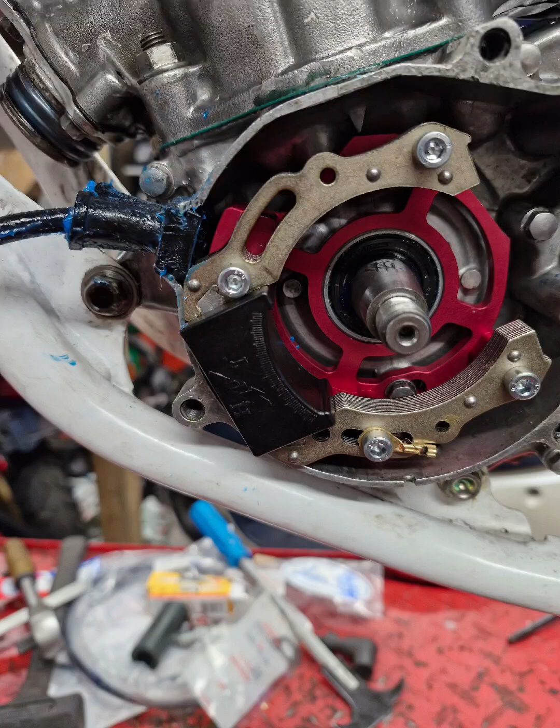So here we go. So she's all built up. 1997 CR80, and supposed to be a running bike when I bought it. Obviously didn't get him to fire it up, which is my own silly fault. I knew there was a problem with the gearbox, which is what I've sorted. And then she doesn't spark, and it looks as though the culprit is the stator.

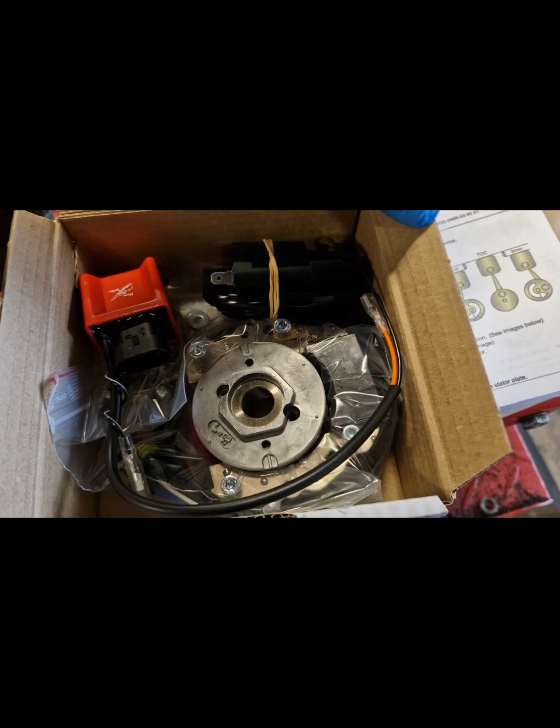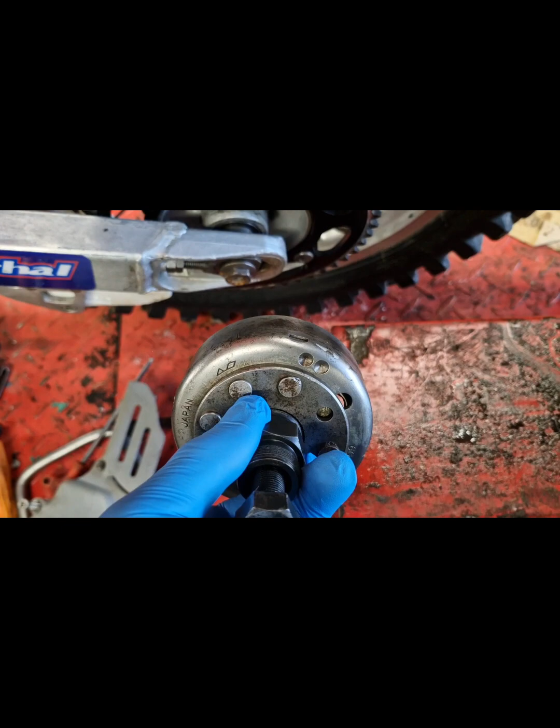So anyway, rather than messing about, I've just gone and bought one of my trusty HPI ignitions. So these ignitions come with everything, an internal flywheel rather than an external. So the external that would have been on it was this one. So internal rather than external. I do think that these do rev slightly freer than your stock ones.

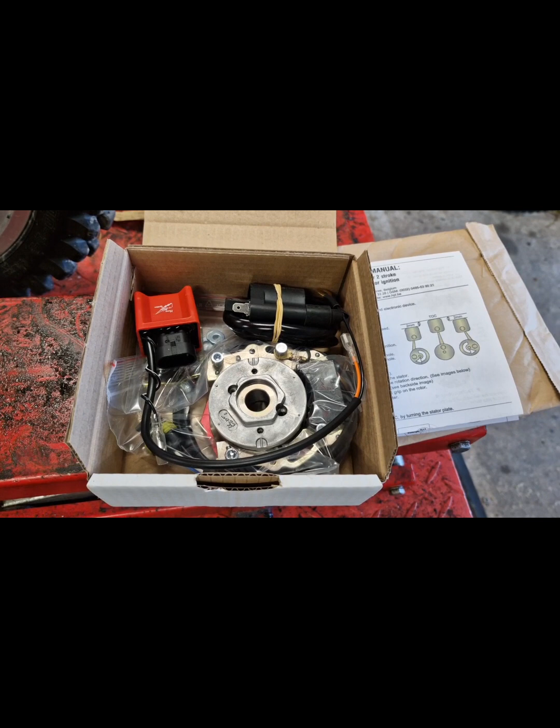So I've done quite a few HPI installation videos. They're pretty much all the same, but I'm going to do one for the CR80 anyway, just because that's what people kind of search for. So we'll try and be as detailed as possible, because in one of my previous ones someone said that the critical step that they were looking for they couldn't find, which I thought was there, but there you go. That's what we'll do. So the first job is, I've already taken the flywheel off.

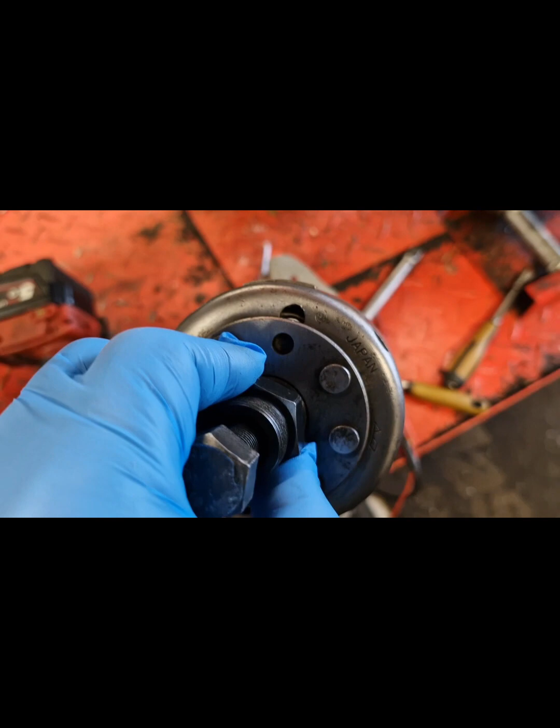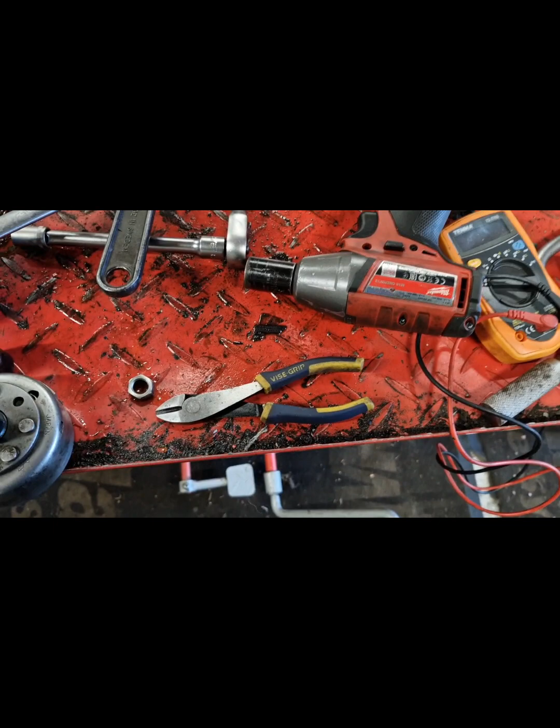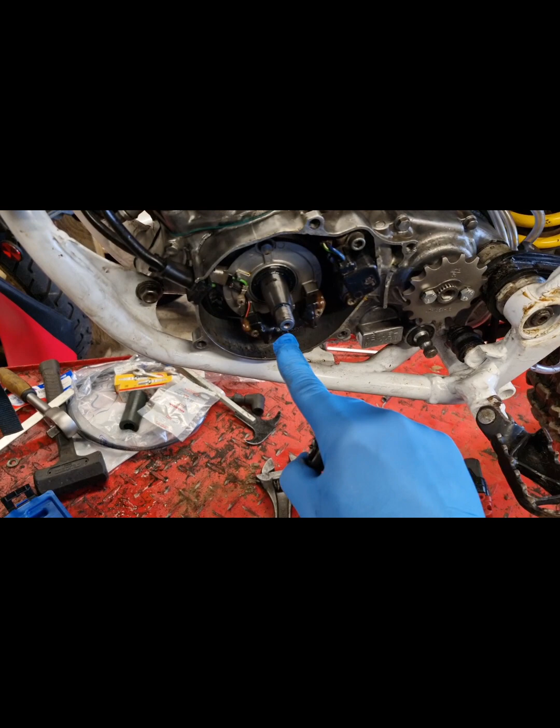You use a flywheel puller similar to this one. Basically you take the nut off. You need an impact driver gun to do that, otherwise you just won't be able to undo it. And then you use a flywheel puller. Basically the fat bit of the puller screws into the outer of the flywheel, so here, and then you use this bolt to tighten down, and that presses on the end of the crank here, and then it forces the flywheel off. Sometimes they can be really tight.

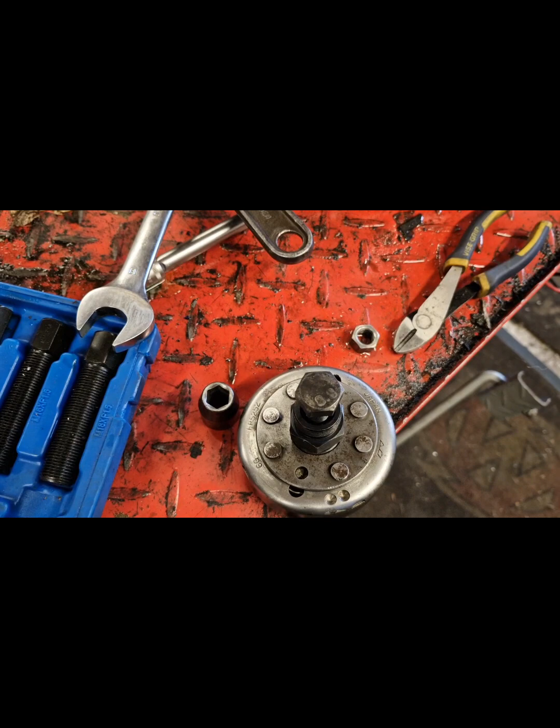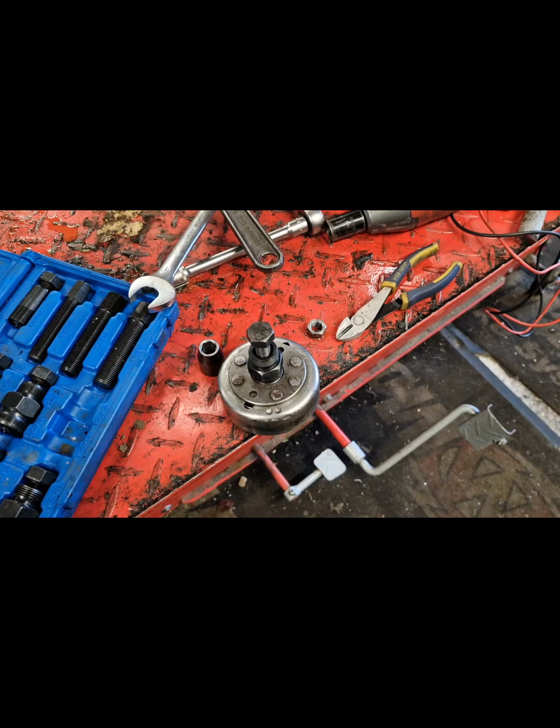I try not to use any heat, but what I do if they're really tight is I'll give the bolt on the end here a whack with a hammer, and then it's just a case of, you know, just keep on slowly. Do not try and over force it, which can be difficult and sounds a bit counterintuitive, but it's just the way that you kind of need to go with these things. So slowly, bit of a whack with a nice metal steel hammer, and then they do end up popping off.

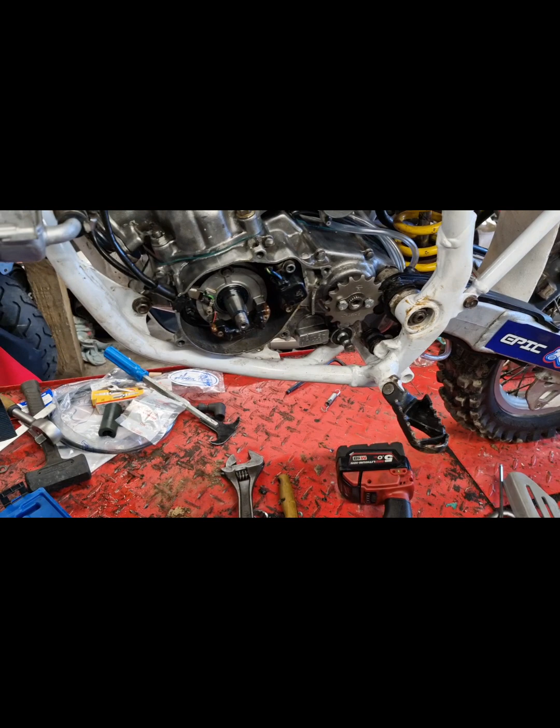And then once they're off, I'm going to take the stator off. This one's got a separate kind of timing sensor which tells it when to spark. Whip the coil off and everything, CDI off, and then I'll mount. In fact, so next video is I'll show you the new stator plate going on, and why I mount that in a certain orientation, and then we'll put the flywheel on, and it's those two bits that are going to do the timing for you. So that's going to decide when it sparks, and then after that it's just kind of mounting the various bits, the coil, the new CDI, and then wiring it up.

Okay, so I haven't mounted this yet, but I wanted to show. So basically, the big thing to get is there are mounting holes which the original stator plate bolted to. And so the key thing is to make sure that the new stator plate, which is the red thing in the back, and that's what's different to a lot of these HPI kits. So generally the actual stator itself is the same. It's all the mounting hardware that is different. So it's quite a complex piece of mounting hardware that's on this.

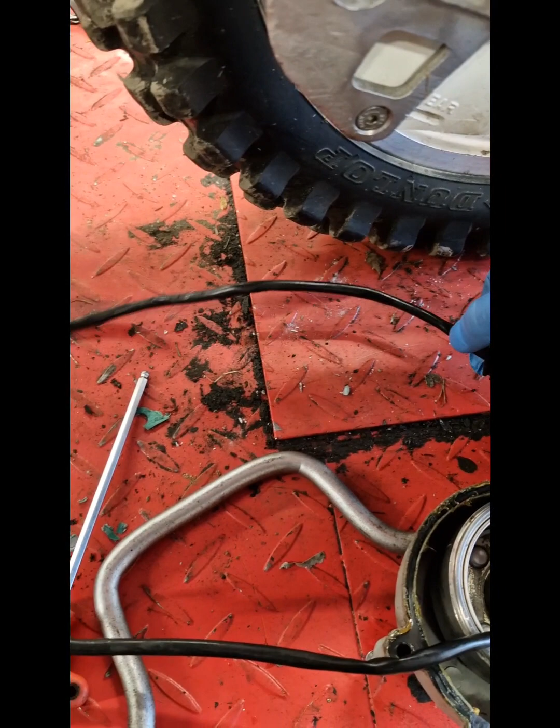And then the bit which I always find a bit of a flipping pain, and it does my head in, is this here. So this is where we want a nice seal from the elements, so from water mainly, and these kits don't come with that, which is a bit of a pain if I'm being honest. So what I generally do is I carefully cut the originals, so I can remove the wiring from the originals, and then I make a bigger hole in, so there's normally only one, there is two with this particular example.

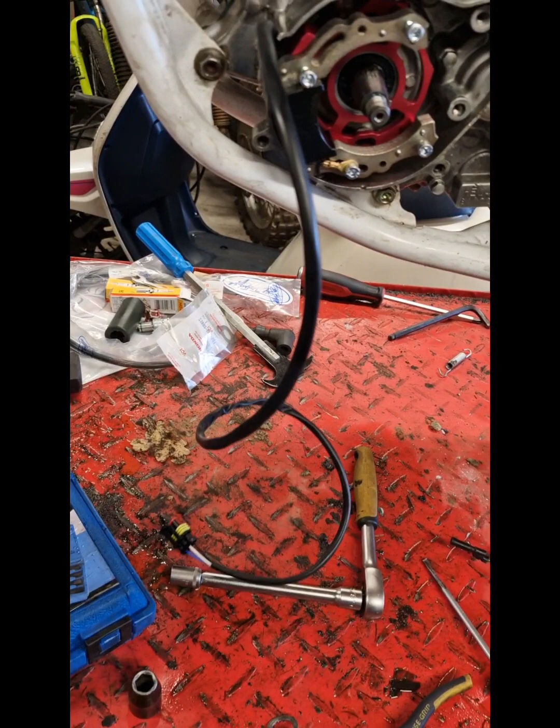I make a bigger hole so that this wiring will feed through it, and then I'll use a bit of silicone or whatever to seal it up at the end, and that does do a good job, but it would be proper nice if they would come with the correct rubber piece to just fit in and just make it all nice. But there we go, beggars can't be choosers, we can't have everything, right?

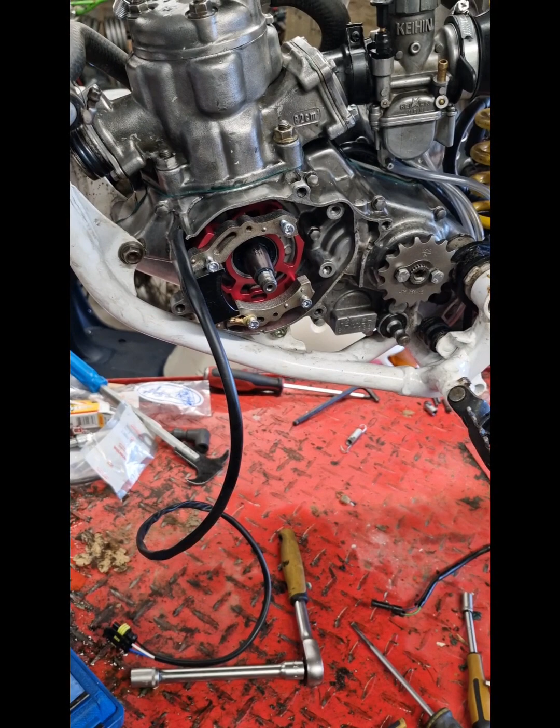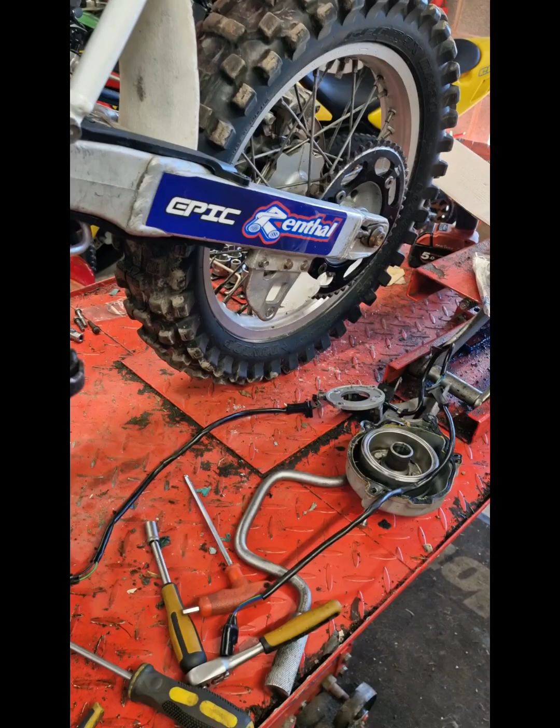So that's what I'm going to do. I'm going to take this stator plate off, and then I'm going to set the actual stator off the mounting plate, and then I'm going to bolt the mounting plate in, and then I'm going to mess about with these little rubber grommets, and then I'll catch up with you at the next stage.

Okay, so we've got the stator mounted, and I've modified the little rubber grommets for the wiring. I say modified, it's not very difficult. You've got to cut the old wire out without damaging it ideally, which I've managed to do. Then you've got to slit down one side so that the new wiring fits inside it, and then we kind of seal it up with a bit of silicone, which I've done.

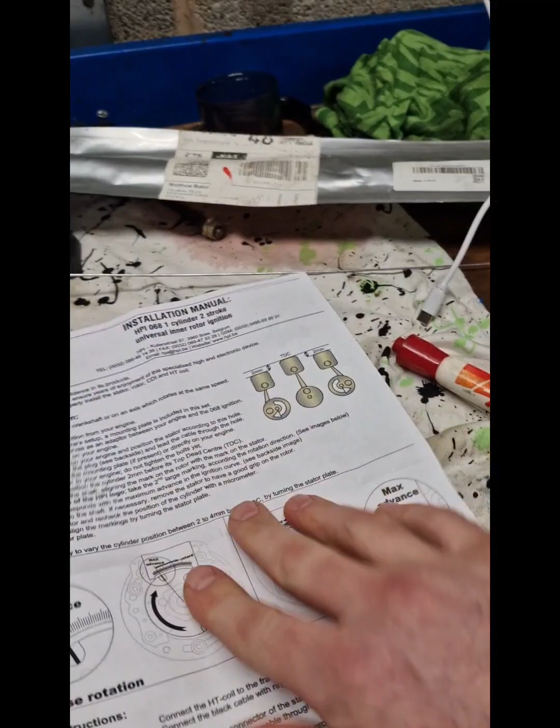Right, the next critical bit is we've got to work out which way the engine turns. So it turns anti-clockwise. Okay, so it turns anti-clockwise. So on the instructions, we like instructions, it shows you. So for counterclockwise, it shows you how to orientate the flywheel.

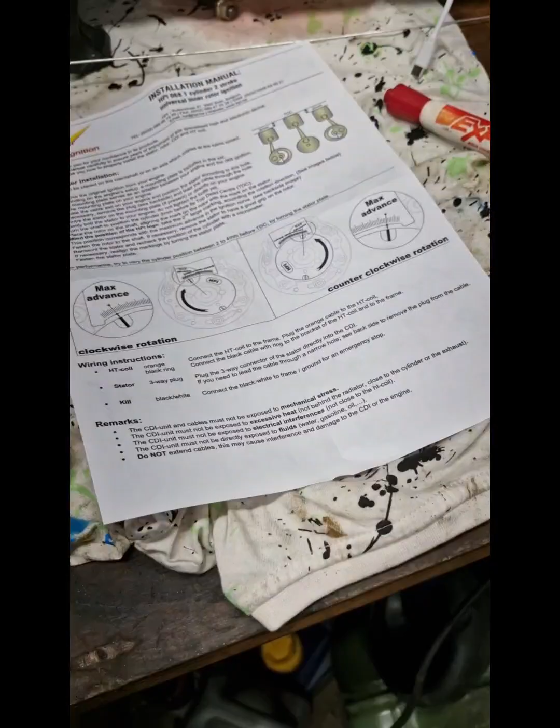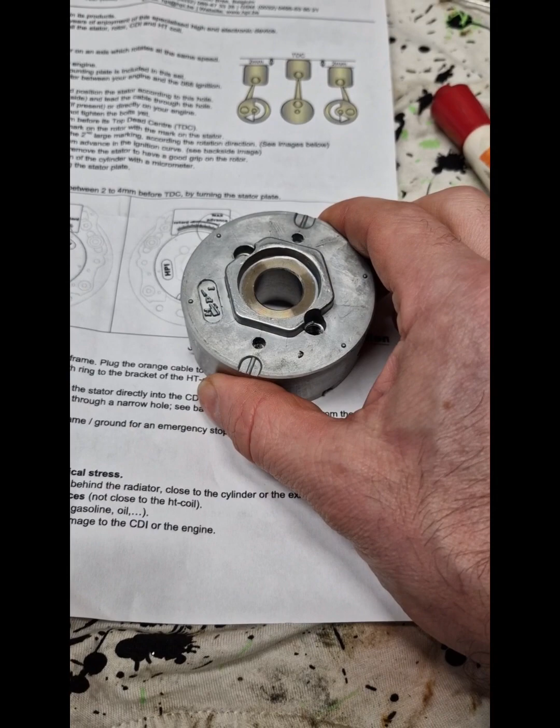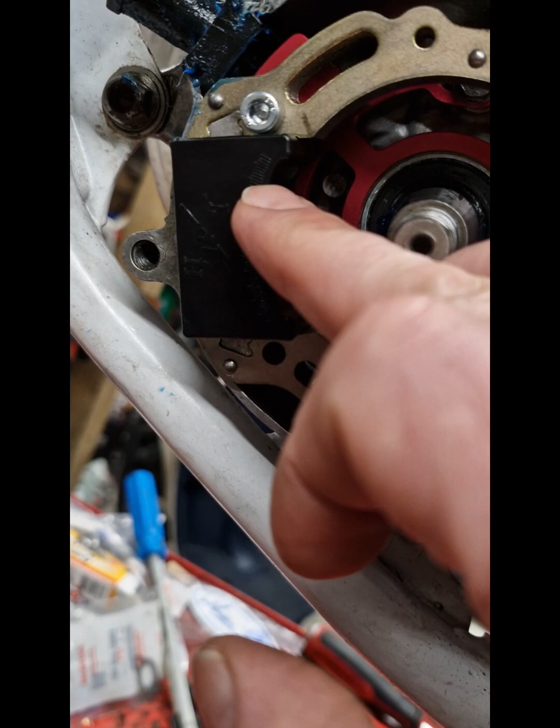So looking at the stator plate here, there's some marks on it. You can see the marks better on here, so we want to go to the second main mark in, and we want the flywheel orientated in this direction. Okay, so what that means is, this mark is going to line up with this mark here when the piston is at 2 millimeters before top dead center.

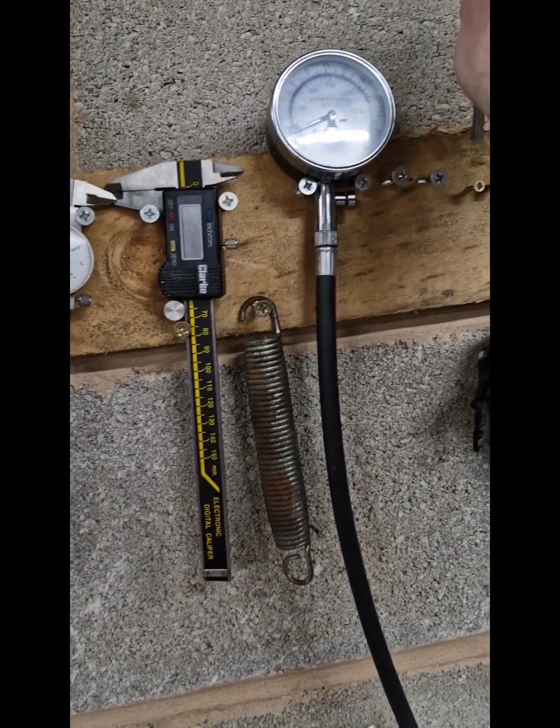So what we're going to do is we're going to get this top dead center gauge, and we're going to screw that into the plug hole, and then we're going to rotate the engine until it goes to top dead center, and then we're going to rotate it manually with the crank. We're literally just going to turn it with our hand, 2 millimeters back from top dead center. So when this is at top dead center, we then need to mark where the 2 millimeters from top dead center is going to be.

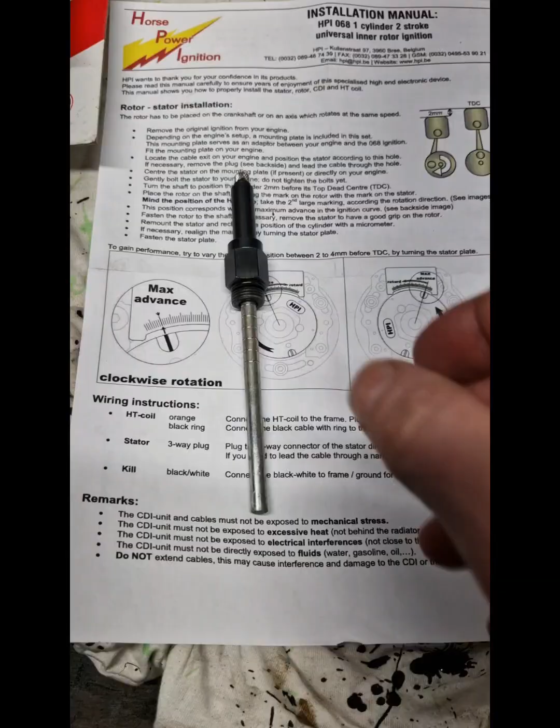So I'll put this in, and we'll get it to top dead center, and then I'll show you exactly what I mean. Bit of a complication. So when this is in here, it doesn't actually fit. The frame is in the way. So I'm going to have to come up with a different solution. So there are different solutions. One of them is that we do this with the head off. So that is one option.

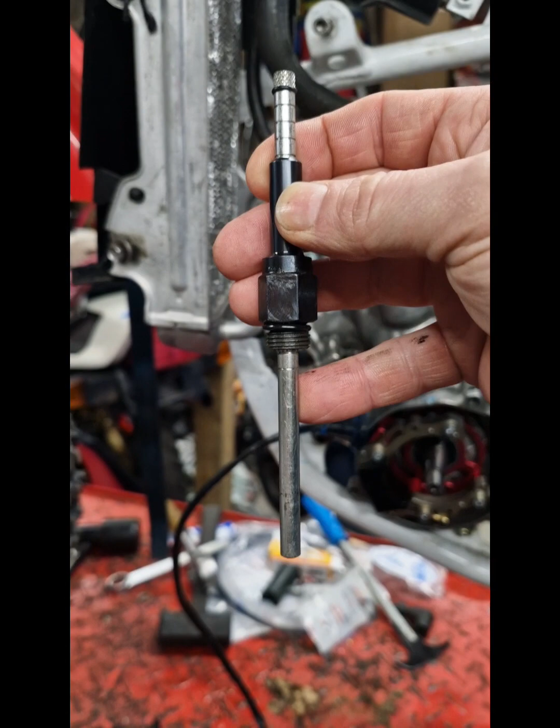I've filled it all with coolant, obviously. So if I'm going to go down that road, I need to be draining it, or I could potentially turn down a piece of aluminium that would fit in here, but that is shorter, and that is probably the route I'm going to go down. So I'm just going to have a bit of a mooch around and see what I think the best job is.

So what I've done basically is I've chopped the bottom off a 6-inch nail, so it does fit in perfectly well now. So look, this is what I'm doing. I'm using the kickstart to turn the engine over, and I'm doing it very slowly. You can see that goes down, down, down. And what we're interested in is top dead centre. So top dead centre is right at the top, so the nail is going to start moving up.

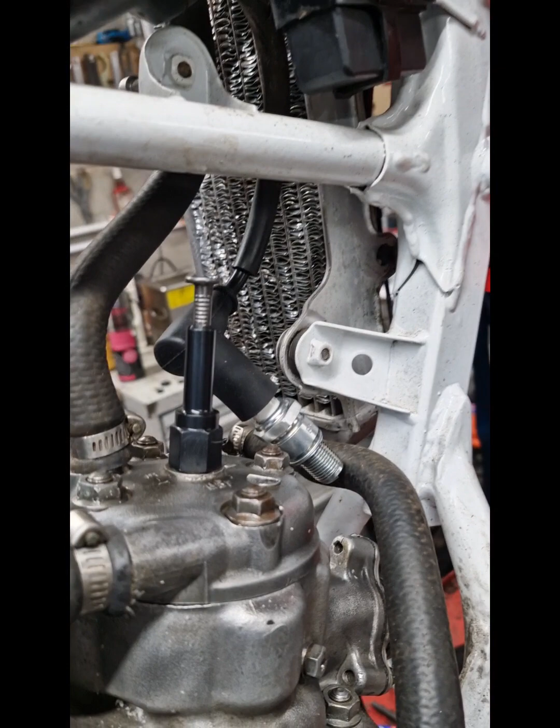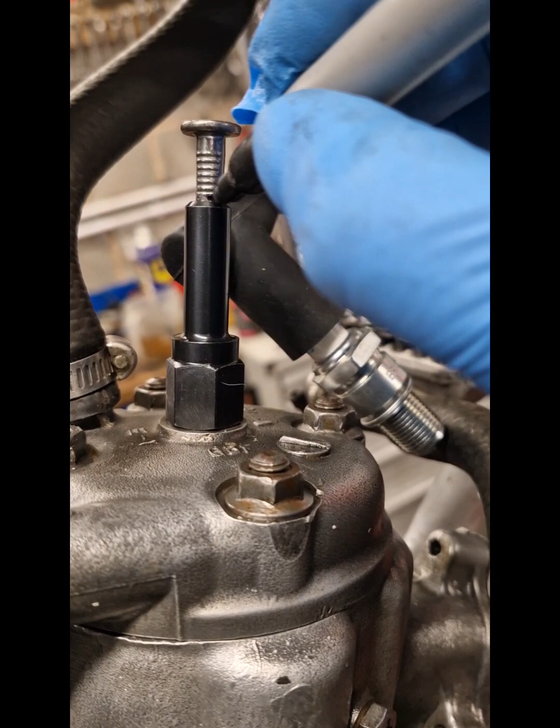It does, and it's hard to do with one hand. And it moves up, and it moves up. And there, that is top dead centre. I can feel it in my hand, that the piston has basically stopped and it's just gone light. So what I'm going to do now is I'm just going to turn that slightly, and I'm going to mark it with a Sharpie. So I've got my mark as to where top dead centre is, all the way around.

Okay, and then what I'm going to do is I'm going to get something that is 2mm, and I'm going to hold that up as I turn the engine back. So what do I mean by that? Well, when I say turn the engine back, we saw that the engine rotated counterclockwise. So the engine rotates this way. We're now at top dead centre. We want to go 2mm before top dead centre. We're going to turn the crank 2mm back from this point here.

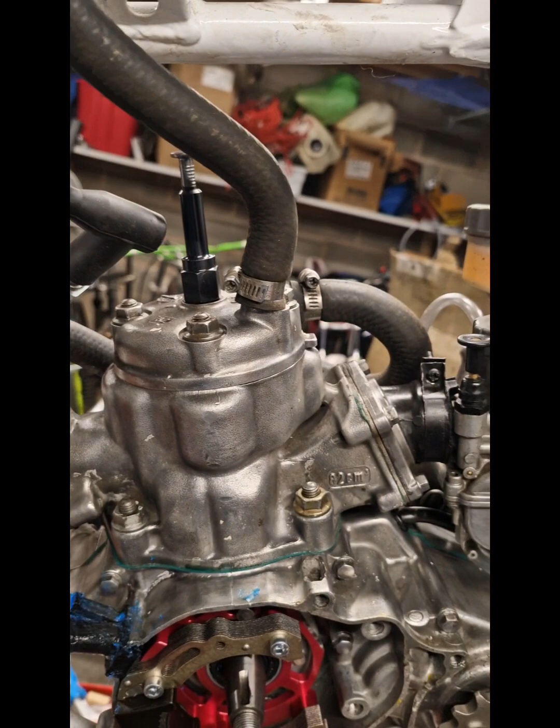So I'm going to get my 2mm thick piece of material, and I'm going to hold it up against here until there's effectively exactly 2mm gap between the mark that I've made in Sharpie pen and the top of the top dead centre tool. So that is difficult to do with one hand. So what I'm going to do is I'm just going to rotate that, get my piece of 2mm thick material, and show you the measurement that I'm going to do.

So there we go. So I'm going to turn the crank clockwise until I've got a 2mm gap. I hope that makes sense. Sorry, I've got that totally backwards. So as I turn the engine clockwise, as I turn the engine clockwise, the nail is going to drop down again. So I want the nail to drop down 2mm exactly from where it was at top dead centre.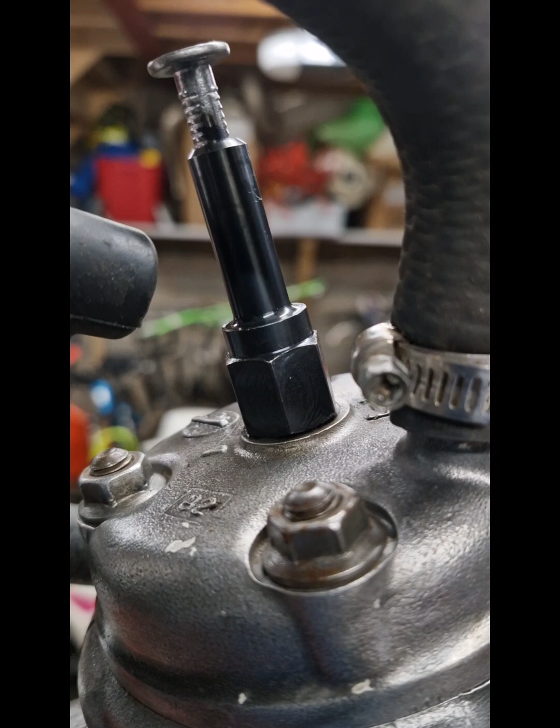So I made the mark with the drill bit, and then I've rotated the engine back using the crank with my hands, and I couldn't do it with just one hand unfortunately, so I couldn't show you. And I've moved it back to where the mark is in line with the top of the top dead centre tool, so I know that this, as we are now, is 2mm before top dead centre.

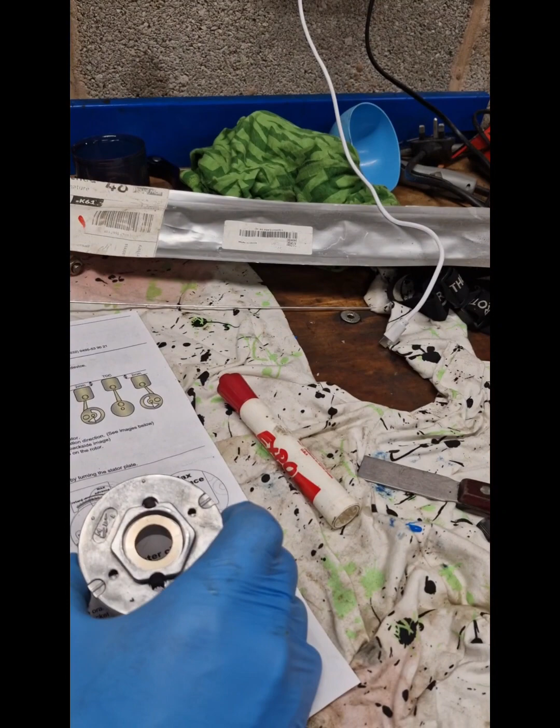So I'm now going to get my flywheel in the correct orientation. So it's this mark on the flywheel that I want to line up exactly with the second larger mark in there, which is there. I'm now just going to tap that in gently, and then I'm going to tighten my nut up, and then we can attach the coil and the CDI and then see if she sparks.

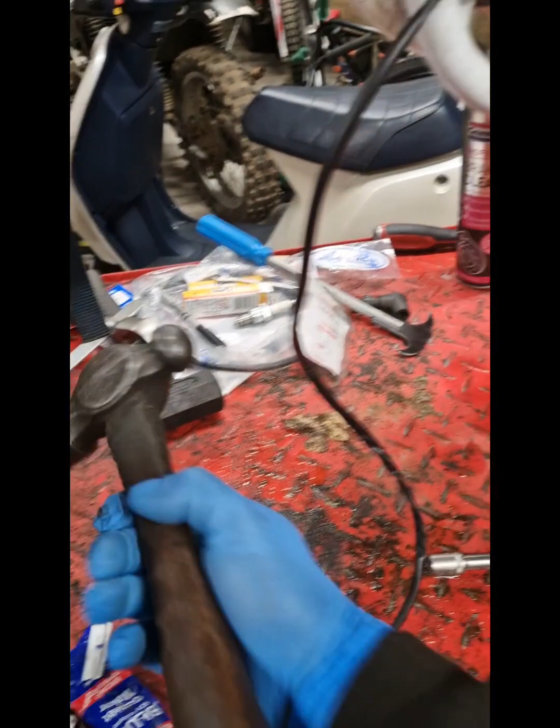So I've used my plastic with a hole bored down it. I've tapped it on with the hammer so it's on firm, and now I've put my washer on and my nut, and I'm going to tighten my nut up until it's finger tight, and then I'm going to tighten it up with my impact driver, and then we're kind of ready to go really. Like I say, we need to attach the coil and the CDI, and then we'll see if she sparks.

We can check that she's not slipped by lining our mark up again and checking our mark that we've made on the nail corresponds with the top of the top dead centre tool, which it does. So we can now take that off, and then we can crack on.

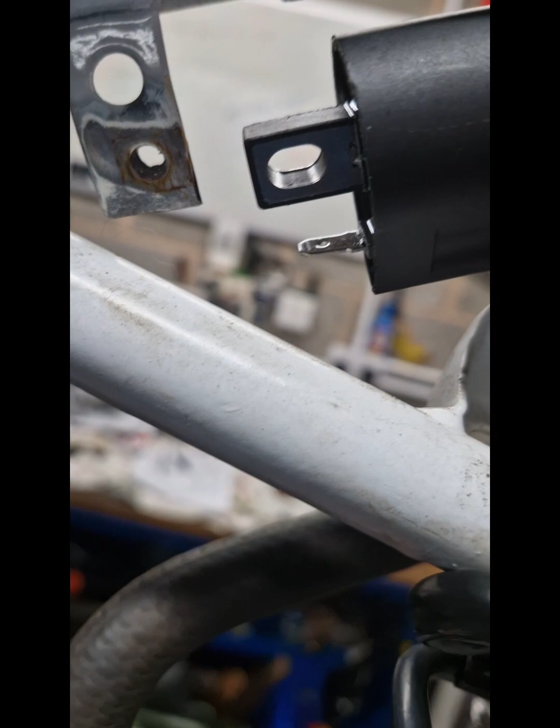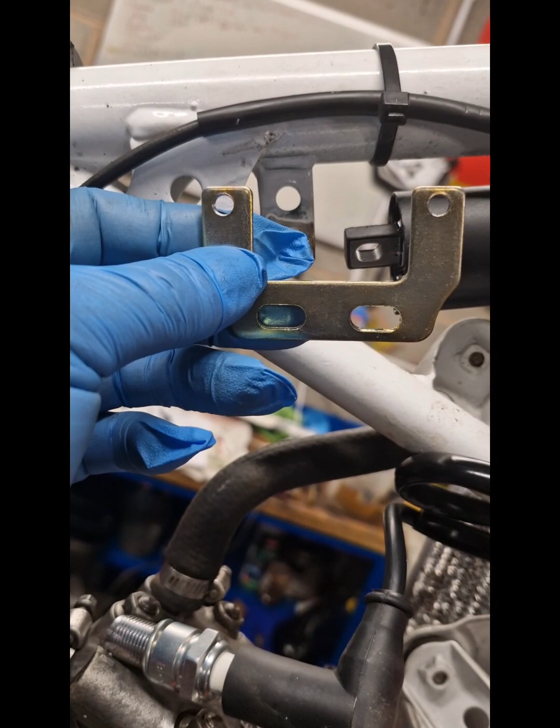So I've mounted the coil, and you can see that the coil doesn't mount up to the mounting bracket on the frame properly. So when I've confirmed that everything's working, this is a mounting plate that comes with the kit. I'll cut that down, and I'll use that to bridge that gap and bolt it with two extra bolts. Screw the plug cap on, and now we can connect up the CDI.

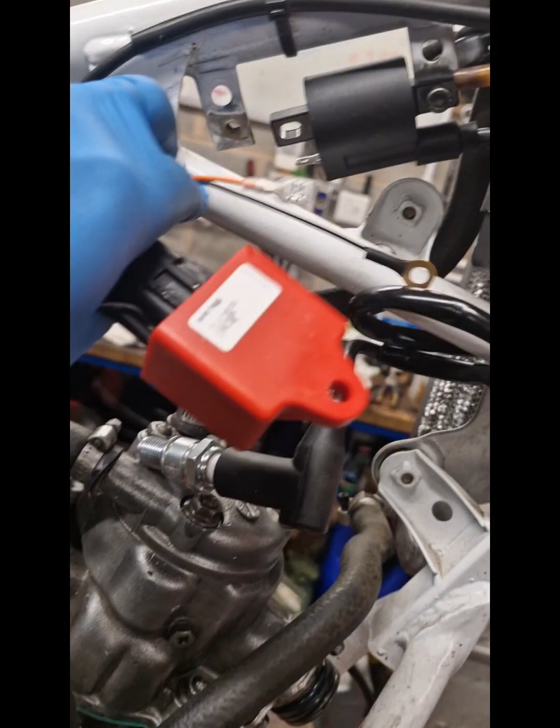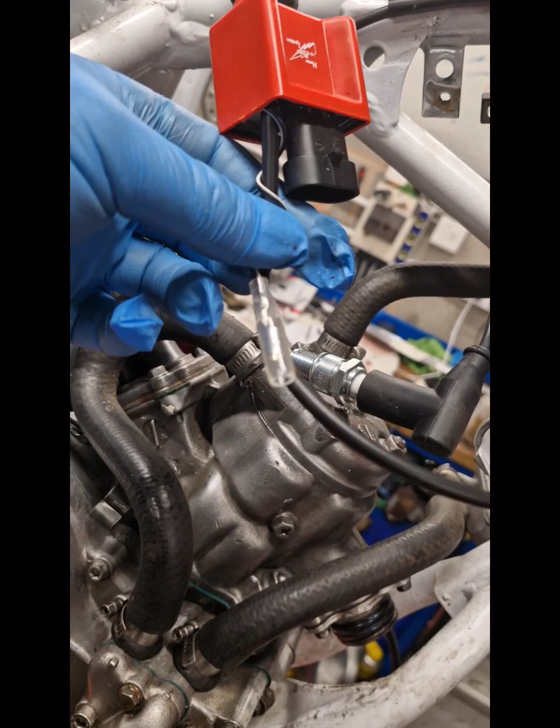So there's 4 bits on the CDI. One is this little round connector here. That should have been mounted onto here on the coil, and then we've got this spade connector which attaches to the coil as well. This black and white wire, that goes to kill switch, and the kill switch also needs to connect to ground, so anywhere on the frame really. And then there's one plug that comes off the stator, which is here, which plugs directly into there.

So I'll just go about connecting all those up. I'll take that little bolt off there, and I'll attach the CDI correctly, and then we can see if she sparks, huh?

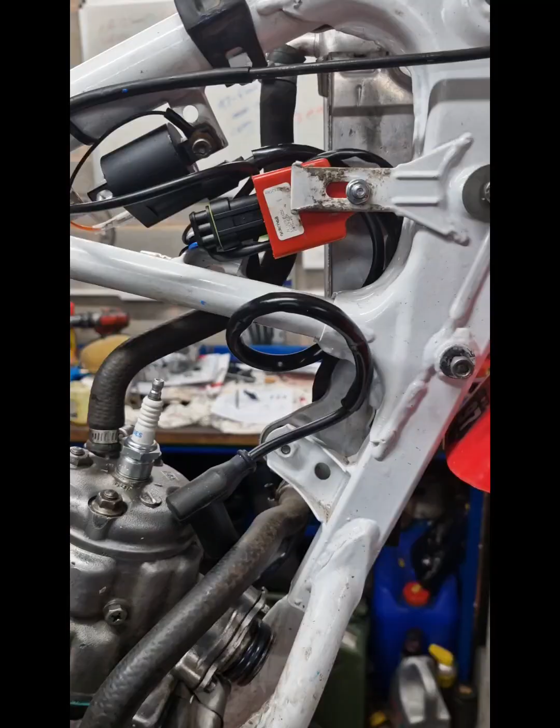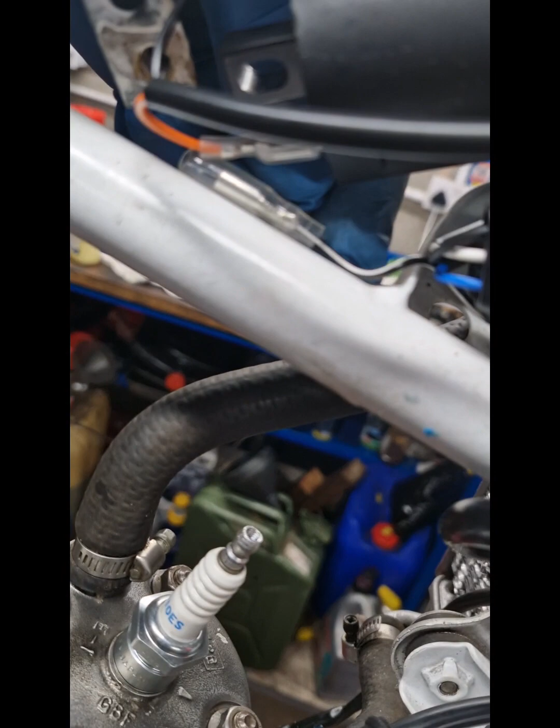Okay, so got the coil mounted. Like I say, I'm going to make a bracket there out of the mounting plate. Mounted the CDI, so this connector comes off the stator, this wire here comes off the CDI, as does this wire on this spade connector, and I've then got one more wire from the CDI, which is this black and white one, which I'm going to connect up to a kill switch, which I'll just do now.

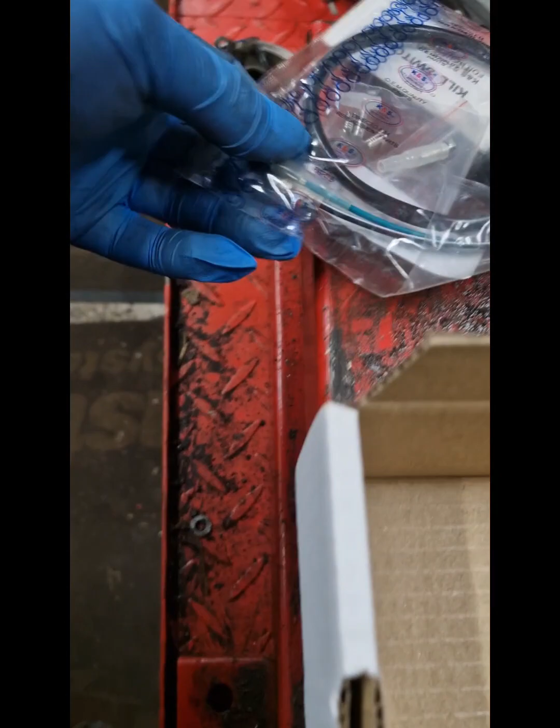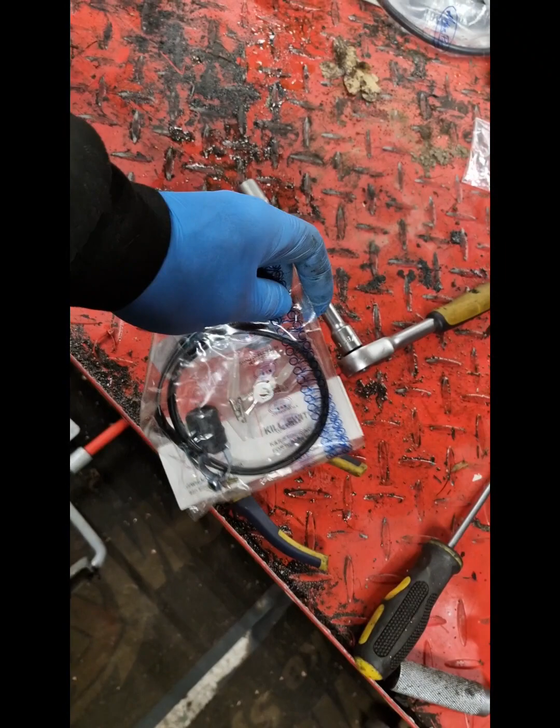So there'll be 2 wires coming off the kill switch. One will connect into that, and one will connect onto an earth. So I'll just find a decent earth to connect that to. And then I've confirmed that it does spark. You won't be able to see that on camera. So hopefully once I've done that, we'll be able to get her fired up.

Okay, so the ignition's on. Hopefully I've shown you in enough detail. I've rebuilt the engine, sorted the gearbox and everything like that out. I have just had it running, started literally within 3 kicks, so you should enjoy this.